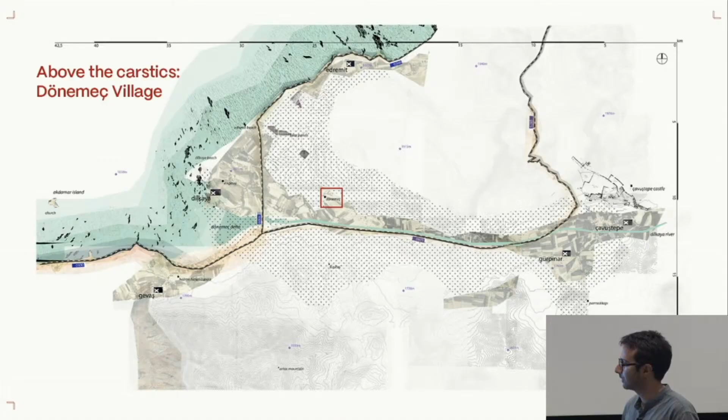In the eastern highlands of Turkey, at the edge of Lake Van, lies Dönemeç village, a place where mountains fracture, rivers slow down, and the earth moves. This is not a tale of rural nostalgia, but a story of deposition, of how architecture can emerge from the ground, respond to time, and host the unexpected. Rural territories are often imagined as still, backward, or empty, but they are full of contingencies, unpredictable, cyclic, and interspecies relations.

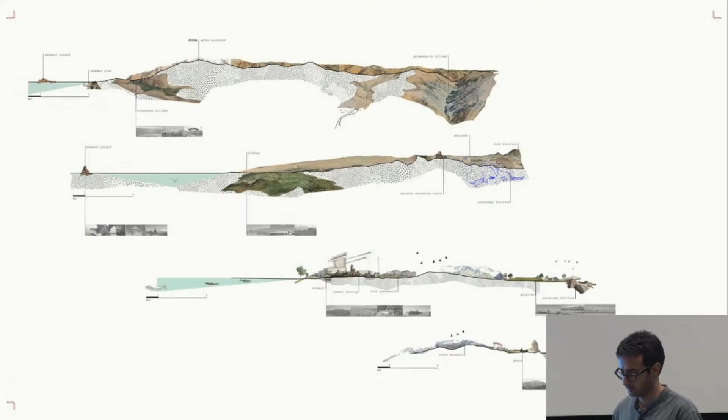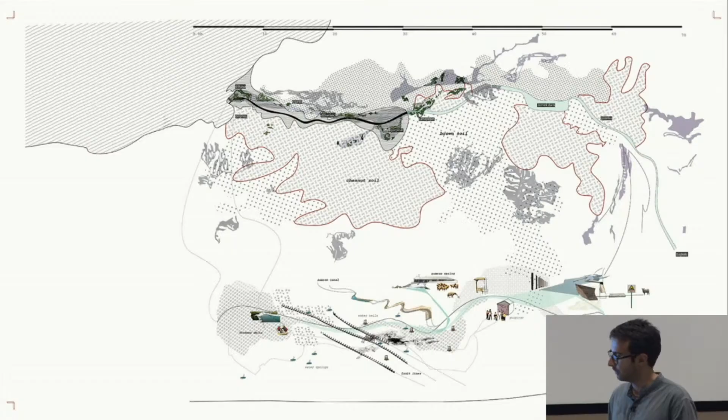Dönemeç is situated where a river from the Iranian mountains meets Lake Van. Its soil is ancient, unstable, and active. The Şamran Fault cuts through the village, triggering over 50 springs, many from Quaternary age karstic formations; travertine, limestone, alluvium, all coexist in motion. This geologic dynamism doesn't just shape the land. It shapes how people live. Washing clothes in the river, grazing animals near wetlands, feeling the tremors underfoot. The hinterland here is not a void behind civilization. It's a reactive, multi-species zone of interaction.

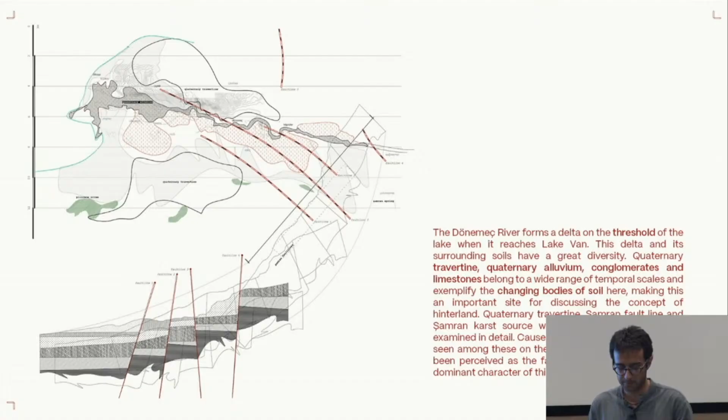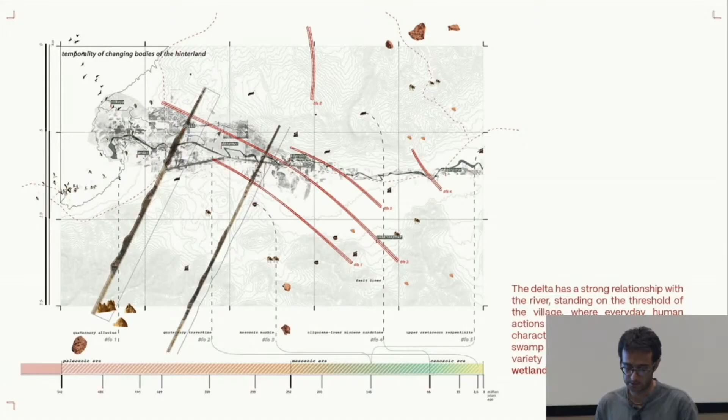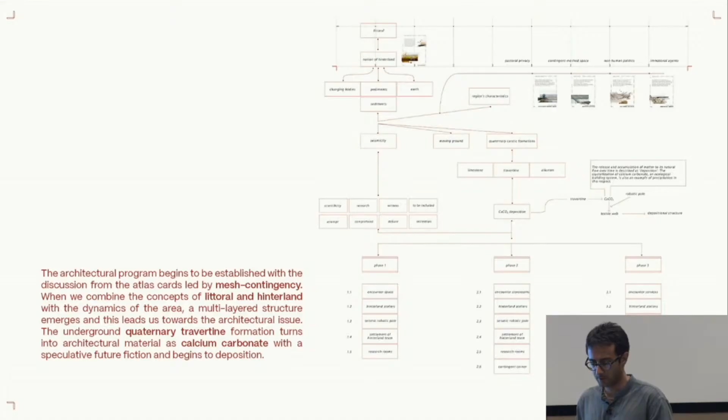So the Deposition School is a proposal that treats the ground as an actor, not a backdrop. It proposes exploring the concept of the hinterland and its ability to create by interacting with the contingent elements, both material and immaterial, within the rural intersectionality and temporality. It imagines architecture as a slow accumulation of calcium carbonates, of relations, of uncertainty, of programs. A seismic robotic pole initiates this process. It moves through the underground layers, detects shifts, and guides deposition. The school views the ground as a living substance and aims to establish space through the material cycle.

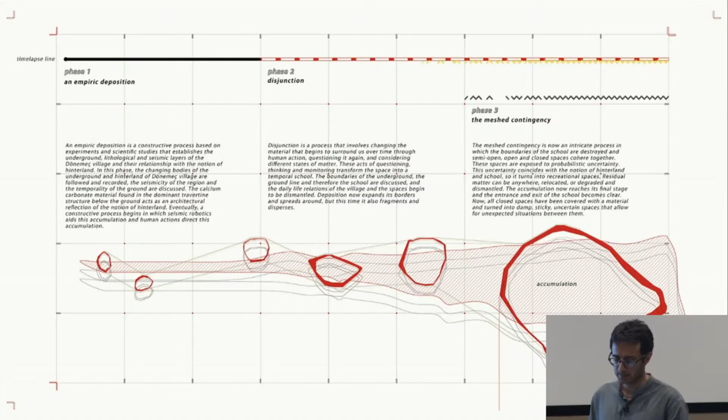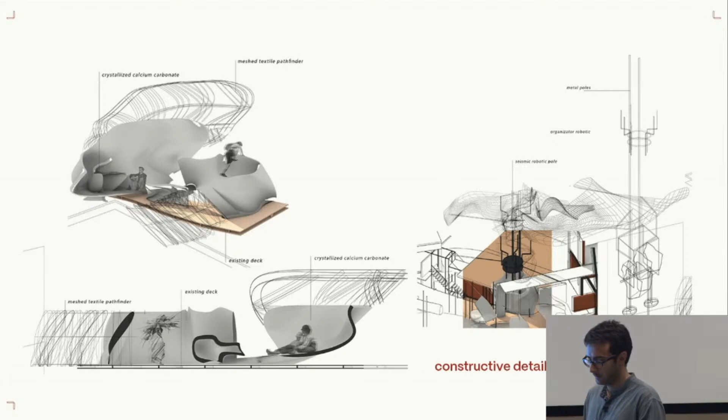So the first phase is empirical, a testing ground. New profiles enter the village, measuring seismicity, tracking the crystallization of travertine. Curtain-like textiles are woven by villagers and scientists. They act as frameworks for matter to settle. At this early stage, the ground's lithological and seismic layers are read and translated into architectural language by this robotic pole. And this robotic pole begins to work. It injects calcium carbonates from the ground and the harvest from underground travertine into the wire and textile frameworks. These are laid and controlled by both scientists and villagers, creating the first test spaces.

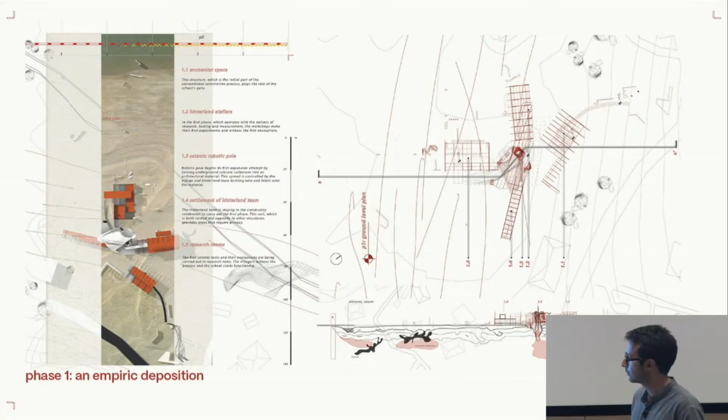So in the first phase, the encounter space acts as a gate. Hinterland ateliers begin testing and witnessing. Research rooms record early results, and a settlement hosts the interdisciplinary team. In the second phase, these frameworks solidify. Calcium carbonate builds up around the textiles, forming partial enclosures. Boundaries are blurred. Workshops begin spilling outside. Villagers begin using the spaces informally. The school becomes temporal, changing with seasons and discoveries.

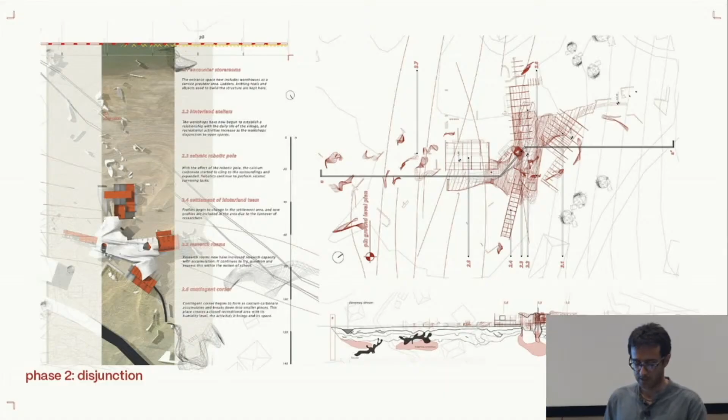Now the school begins to react to the village. Deposition thickens. Workshops open to the outside, and the robotic pole continues to shape and measure. And calcium carbonate starts to create semi-closures from the hole around here. Ateliers become more porous, connecting with the village. The contingent corner emerges, a humid, strange interior full of broken matter and uncertain actions. The storage rooms here hold the tools, ladders, wires, frames used in the building. And the settlement shifts as new researchers arrive. And the research rooms expand their role, now questioning, provoking, not just recording.

The school creates, collects, distributes, scatters, and with the inclusion of the notion of the future, it contains the possibilities of breaking or dismantling the material and reusing it. Finally, the third phase is meshed contingency. The architecture becomes porous and fragmented. Some spaces are open, some sticky and damp, some reused or dismantled. This is no longer a school as we know it, but a recreational organism that allows uncertainty to occur, like a wetland of knowledge.

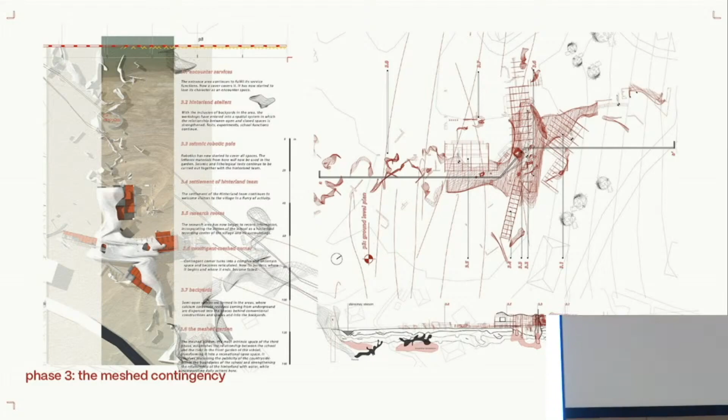In this phase, uncertainty takes over, the boundaries dissolve, calcium carbonate accumulates everywhere: on roofs, around frames, between walls, into the backyard. So the mesh garden, here and there, becomes the heart and open area where school meets river. Backyards absorb residual materials from deposition, forming semi-open pockets. Ateliers become flexible between open and closed. The contingent mesh corner, just over there, is now a fuzzy, reticulated field of damp, overlapping spaces. And the robotic pole still operates from the ground, but now contributes to the garden matter.

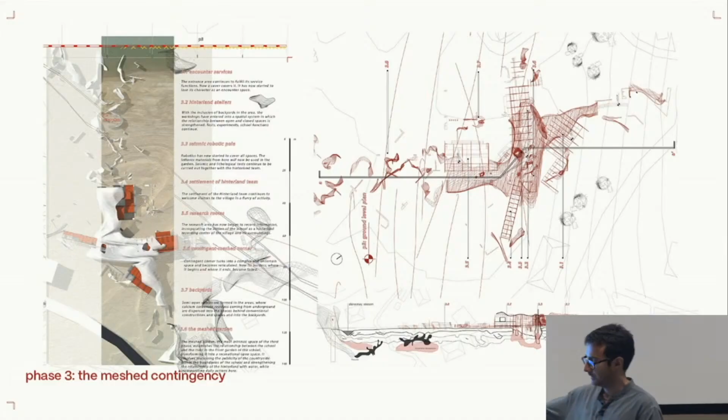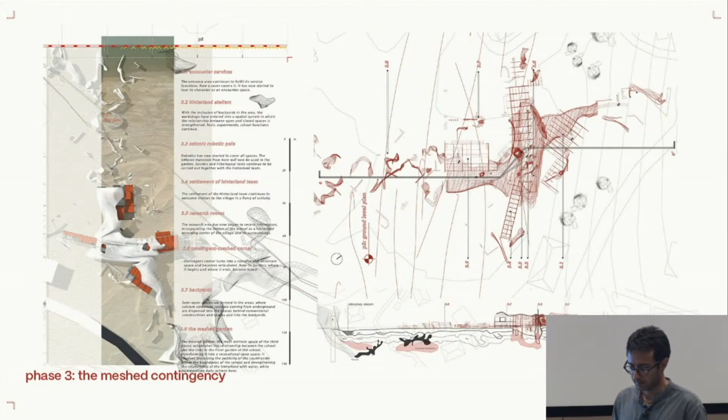The encounter space has become service-oriented, losing its gateway status. The settlement here continues as a hosting hub, and the research rooms have become archives recording the evolution of the village itself. In this phase, the school is less of a building, more of a living landform. The architectural program considers speculative future scenarios in which the material is dismantled, dissolved, fractured, or eroded after phase 3, culminating in a final phase, where diverse profiles collectively engage in contingent actions within various experimental setups.

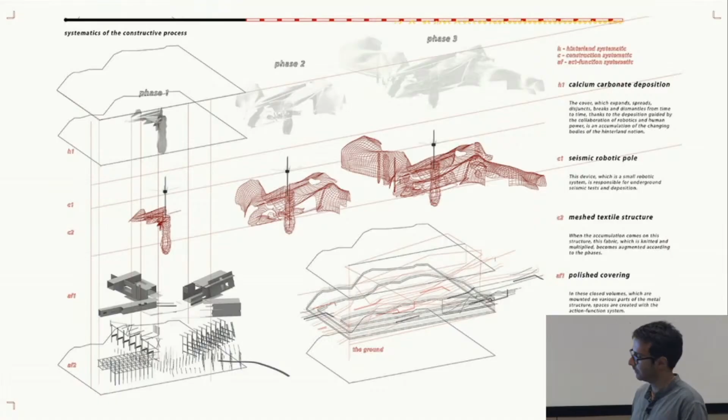This school doesn't end with construction. It also imagines disassembly. As materials decay, melt, or dissolve back into the ground, new scenarios emerge. Structures are moved, reassembled, or abandoned. This doesn't represent failure. It represents adaptability. Over time, the school records itself through research rooms, material residues, and oral exchanges. It becomes a document of how rural spaces can host experimental futures without erasing their indigenous rhythms.

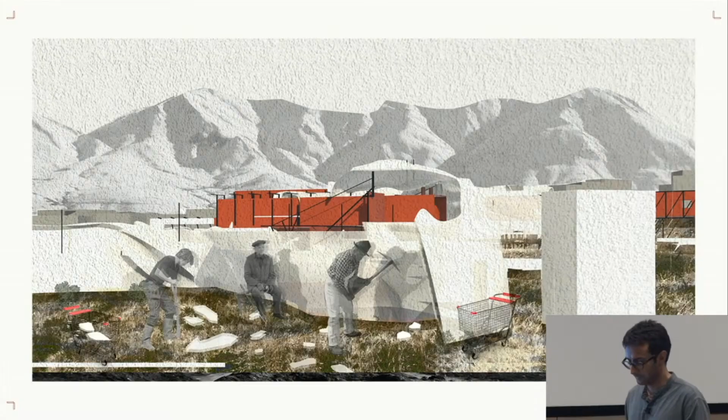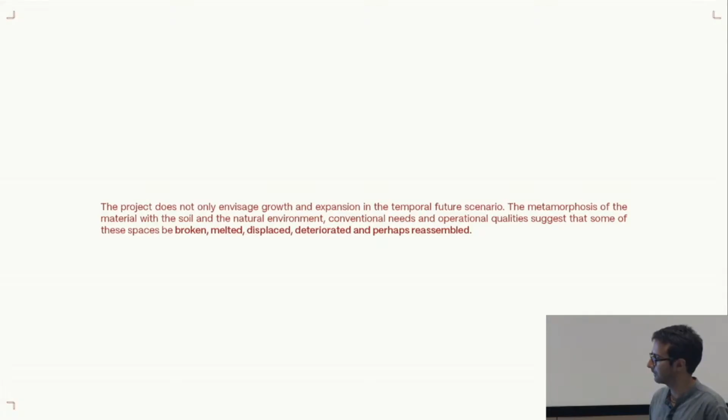In a world that often rushes towards speed, efficiency, and permanence, the Deposition School offers slowness, fragility, and transformation from the material cycle. It is not just a project of material accumulation, but of relational sedimentation between villagers, scientists, humans, and also non-humans, the past and speculative futures. And it asks, can a school teach us to build with time instead of against it? Can architecture learn to grow, to fail, to become ground again? And lastly, Dönemeç may be a small village on a seismic delta, but perhaps it's exactly the kind of place where the future begins to precipitate.